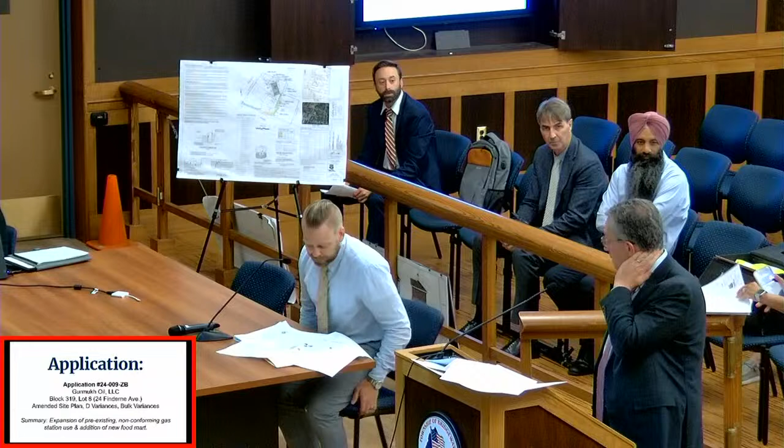What this depicts here, marked as A1 and identified by title block, is the Swept Path Exhibit dated May 6th, 2025. What we show here is an SUV parked at both fueling positions closest to the parking stalls, as well as cars accessing both the handicap stall and the stall next to it, which are nearest to those fueling positions. What we can see is the ability to back up at that 90 degree angle and avoid the vehicles that are fueling.

That exhibit depicts the fact that there will be no safety or circulation concerns with regard to the movement of vehicles such as an SUV around the site. Certainly there's space to maneuver, so the site remains safe and efficient for maneuverability. Correct. Thank you.

There was also a question Mr. Vandervalk asked regarding a drainage pipe at the property. The original site plan showed that the roof leaders from the canopy, as well as the roof leaders from the building, which currently doesn't exist, would be tied into the catch basin on the side street located to the south, that's 3rd Street. I have confirmed that pipe was installed, so when the new building is constructed, we would tie in those roof leaders into that existing pipe.

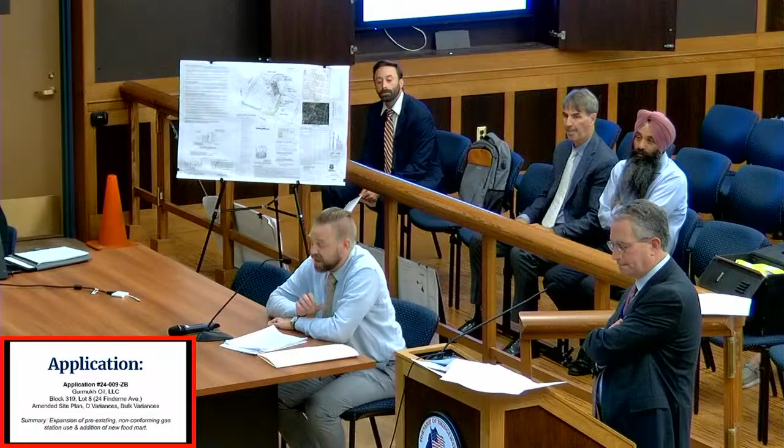There was also a question about whether it was trip generation or just circulation generated from this project. We did take a look at the trip generation based on the trip generation manual from the ITE, Institute of Transportation Engineers. If we were to use the land use category of convenience store and gas station, that category actually only bases trip generation on the number of fueling positions, so we would actually see no change in trip generation.

Seeing as that doesn't change anything, we've considered it as a standalone convenience store for purposes of determining how many additional trips we would see. The result was that during the morning peak hour, we would see 4 additional vehicles to the site, and in the evening peak hour, 3 additional. So in the morning, an additional car about every 15 minutes, and in the evening, an additional car about every 20 minutes.

And that's just based on a scenario where the only use on the site is a convenience store, correct? So if, in fact, as will be testified to, most of the patrons to the convenience store or mini mart are there primarily to fuel, that number is expected to actually decrease, correct? Yeah, correct.

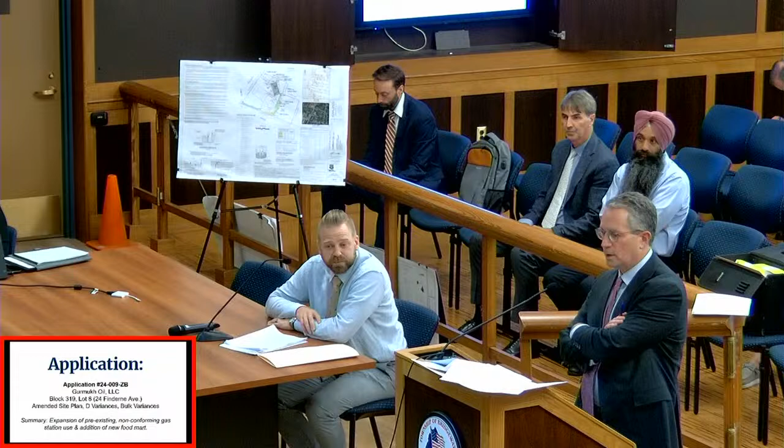As mentioned, when we considered both convenience and gas station, there was no change. So this was a conservative assumption to see that slight change. I believe that concludes the questioning of Mr. Vandervalk in terms of additional information that the board asked that we provide.

Board questions. I have a question. You provided this turning analysis to show you can back out a car here. Now the spot near the convenience store, that's an ADA, a van accessible ADA spot, correct? That's correct. So the vehicle that you use is an SUV. Is the van... have a larger turning radius than the SUV that you use to prove that the size of this parking area is acceptable? I wouldn't anticipate, so no.

So the van would have the same turning radius as an SUV. It would be comparable. Would that in any way, with what you're showing here with 2 cars at the pumps and 2 cars in the parking stall, would that in any way cause an issue for a van backing out? No.

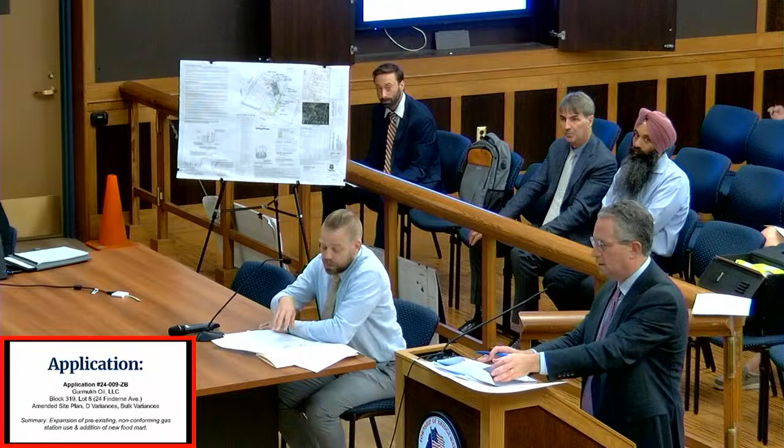Okay, thank you. I had a question. You marked on the east side, I guess that's the northeast side, as brush. When I was at the property, there are 2 mature trees there. I think they provide a substantial vegetative buffer. You're not planning to chop them down, right? Definitely not, everything's going to stay. The trees, for purposes of this exhibit, were removed from the survey. If you look at the original site plan file, they should be on there. I just wanted to make sure, because you have it marked brush, and brush tends to get cut down. I want to make sure the mature trees are not going to get touched in any way, shape, or form, because they provide a buffer to both neighbors on both sides. Absolutely. All right, thank you.

Other board questions? Members of the public, questions on engineering? All right, seeing none. Thank you, Mr. Chairman. At this time we'll call Ben Heller, our landscape architect, please.

Would you raise your right hand, please? Do you solemnly swear that the testimony you will give to this board will be the truth, the whole truth, and nothing but the truth, so help you God? And your full name for the record, please? Ben Heller. Would you spell your last name, please? H-E-L-L-E-R. Thank you, Mr. Heller.

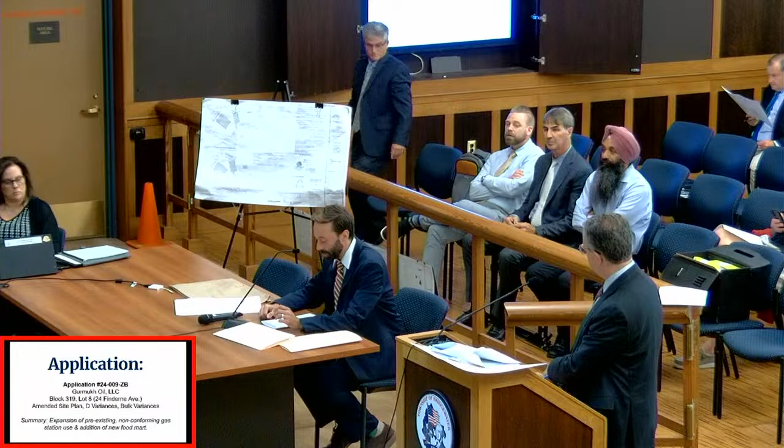Mr. Heller, can you please provide the board with your occupation, affiliation, areas of expertise, and license and experience in the field of landscape architecture? I am a licensed landscape architect in the state of New Jersey, New York, and Connecticut. I am a 2010 graduate of Rutgers University. I've been practicing landscape architecture since graduation. I've testified before various planning boards and zoning boards across the state, Washington Township, Closter, Summit, Frankford, Tenafly, Mendham. I'm the previous chairman of the planning board in West Orange as well. And your license in New Jersey is current and in good standing? It is, yes. All right, we accept you as an expert. Thank you.

Mr. Heller, you're familiar with the application, the property, and the surrounding neighborhood? I am. And you prepared a landscape plan in conjunction with this application? I did. Okay, I guess we're going to mark that as A2. Thank you.

So again, for the record, Mr. Heller, can you just identify what A2 is, please? A2 consists of the landscape plan which was previously approved by the board, and the proposed landscape plan for today. So if you would just go over, because there were some concerns raised appropriately by the board at the last hearing about some underbrush landscaping that may appear to be dying, and what we're going to be doing to address that.

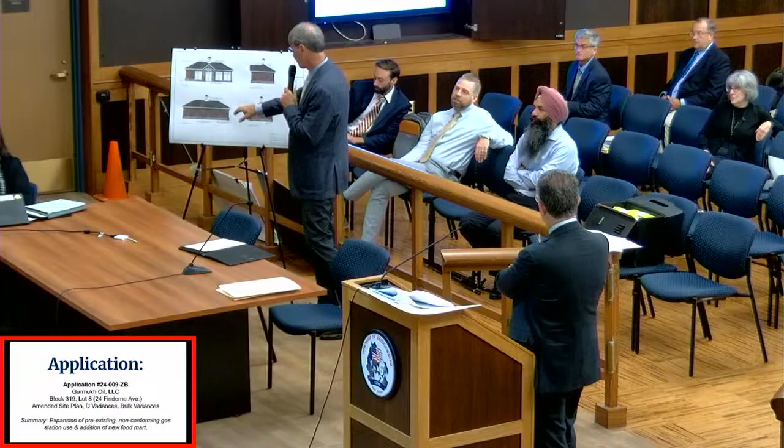So what we have here on the top left is the front elevation. This faces the canopy, with the main entrance door. We've added a stone veneer to the lower section, and to emphasize the front door, a treatment around that door with stone veneer. The stone veneer carries around all 4 sides of the building, so not to dismiss the sides or the rear, we have that stone band that comes up about 2.5 feet and extends around the 4 sides. The siding material being proposed is fiber cement.

It's a HardiePlank, which most people know it by. It's a quality product we use very often. It would be vertical siding in a traditional nature, board and batten type siding. Our office is in Chester, and a lot of what we do is historic architecture. I think it's a look that's very timeless and appropriate for this location.

The roofing material we're proposing is a standing seam metal, again to try to be consistent with the overall architectural features and style of the building, and we think it complements nicely. The height of the building proposed is similar or identical to the prior approval - 19 foot, 11 inches to the highest point from average grade, from finished floor. The only addition to that height is the center cupola we've proposed, just to create a little drama and balance to what's now a fairly symmetric building.

Sheet number 2 of our set, again unchanged and unrevised, so this is exactly what you guys have gotten to see. Represents the floor plan that's proposed. And again, you can see it's a fairly simple building, 25 feet front to back by 50 feet in width. Same essential envelope as the prior building, but the prior building just had that cutout on one side that we've infilled here.

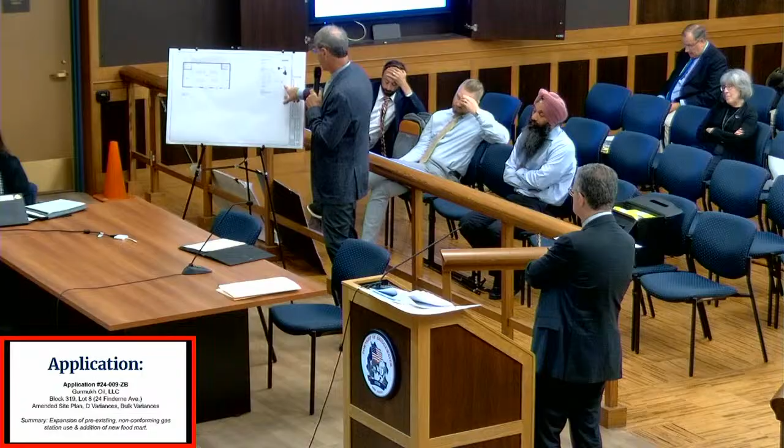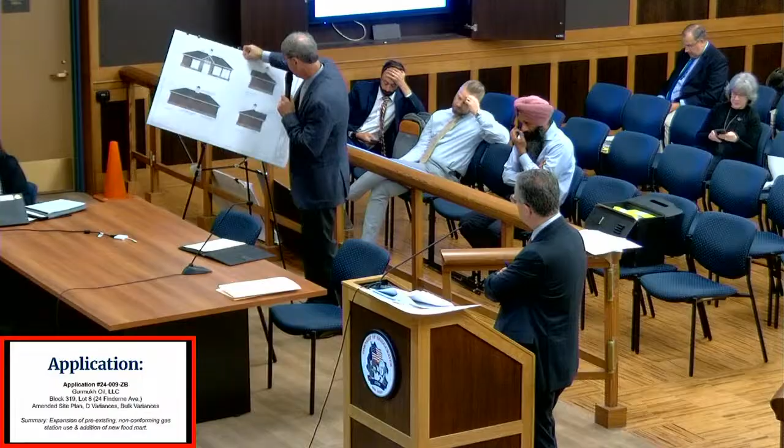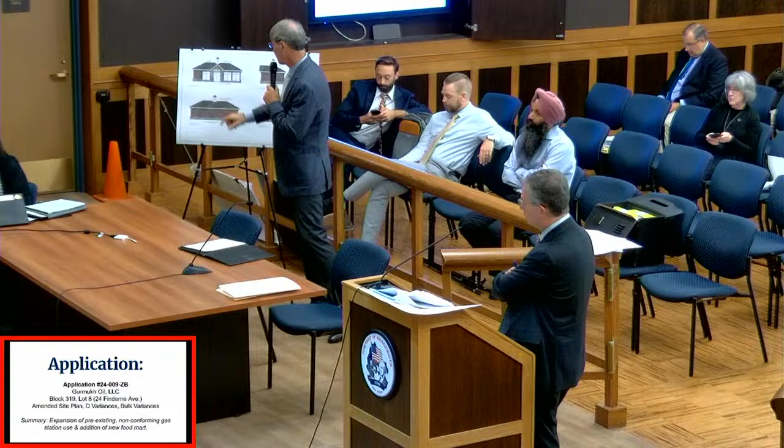And lastly, on this design, we've got the sign light detail, which is just the gooseneck light we'd be installing over the front building-mounted sign above the door. That would be located in this location in the gable. We are proposing one sign that indicates the name of the market as Pleasant Market. The sign dimension is 2.5 feet in height and 6 feet in width, roughly the width of the front entrance doors. So essentially that is what we're proposing.

And you believe, based on your experience in architecture and familiarity with the area, that the proposed design is appropriate and would blend in well with the neighborhood? I do feel it's appropriate. I did notice that the prior approval had a building that was primarily masonry with cement plaster, stucco on the back and sides. I don't find that to be particularly consistent with the neighborhood. So our goal here was to try to create something that was, I think, a little more compatible, and I think we've done that.

Okay, I have nothing further from Mr. Byrne. Questions? Are there any other structures planned, like an enclosure for garbage, or if propane is sold there, would that be enclosed as well? To my knowledge, there's no other structures proposed, none that we were involved with designing, so I would think not. I mean, the canopy exists today, and I don't think there's any proposed changes to that.

I'm sorry, so the garbage is going to be just a dumpster? I would defer that question to our site engineer. There is a masonry enclosure that exists today, Vandervalk is just going to clarify. They do need to repair and replace the doors on it, but that was constructed as part of the last approval.

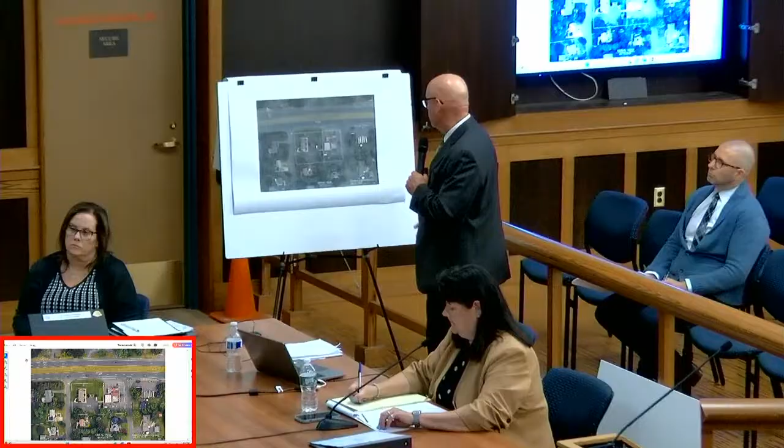Identify it first. I will be discussing the site plans which were submitted, consisting of 8 sheets dated last revised April 3rd, 2025. I also have a few exhibits. Do you need the site plan set marked? We don't have exhibits to mark yet for what you're about to talk about, right? Why don't we mark that A1, and then you can identify what that is for the record, and put today's date on it as well.

This is a Google map aerial photo dated 2025. It indicates the existing properties surrounding U.S. Highway Route 202 and the surrounding streets. I'll describe what this exhibit consists of.

Two properties: block 163.02, lot 17, known as 705 U.S. Highway 202, is developed with an existing two-story, approximately 3,675 square foot Cafe Amelia restaurant. Block 163.02, lot 9, known as 49 Charlotte Drive, is developed as an existing one-story, approximately 1,418 square foot church, which is to be removed.

Lot 17 is approximately 0.352 acres, and lot 9 is approximately 0.543 acres, both combined totaling 0.895 acres. The property has 3 frontages, one on US Highway 202, and the other two on Charlotte Drive West and Charlotte Drive East. The property is located in the R20 zone, and the surrounding uses include residential and commercial uses.

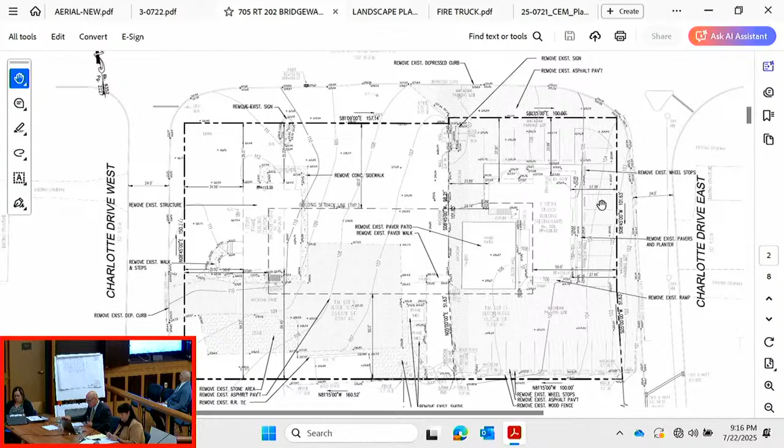There is a variance required for the expansion, and what I will do is switch to the site plan at this point. Is that part of the site plan set? Yes, it is. This is sheet 3. Sheet 3, okay.

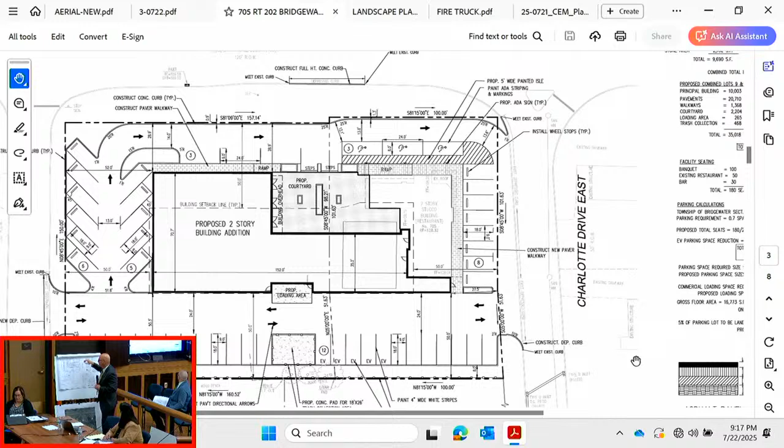Along Charlotte Drive East, there is an extension of the existing restaurant, approximately 10 feet in width, and that would also extend the front yard variance requirement for this application, just for that 10-foot location.

Existing days and hours of operation: Monday through Friday for the restaurant is noon to 10 p.m., Saturday is 3:30 to 11 p.m., and Sunday is 3:30 to 9 p.m.

Could you repeat those times again? These are the current hours of operation: Monday through Friday, noon to 10 p.m.; Saturday, 3:30 p.m. to 11 p.m.; Sunday, 3:30 p.m. to 9 p.m. And the current peak hours are Monday through Saturday, 6 p.m. to 9 p.m.

The applicant is proposing days and hours of operation for the restaurant and banquet hall: Monday through Saturday, noon to 11 p.m., and Sunday, noon to 10 p.m. The rooftop bar days and hours is Monday through Wednesday, noon to 11 p.m., Thursday through Saturday, noon to 12 a.m., and Sunday, noon to 10 p.m.

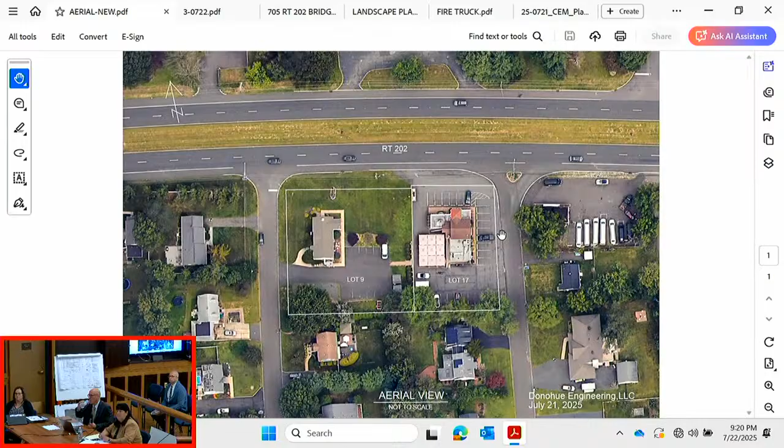So who approved it? They must have been in front of a land use board at some point. They must have. So can you show us that, please? Not right now, I can't, but we'll do an open request with your records. You would be the keepers of the records, so we'll see if you guys have the original resolutions. And you haven't done that yet? We may have done an open request, but I don't have it with me now. I don't bring the entire file with me.

Dog ate your homework? No, I don't bring old resolutions with me normally to a board hearing. So how did you get to 94.68%? That's the way it is. I can't give you the past history. I wasn't here 26 years ago, but we'll find the answer out for you.

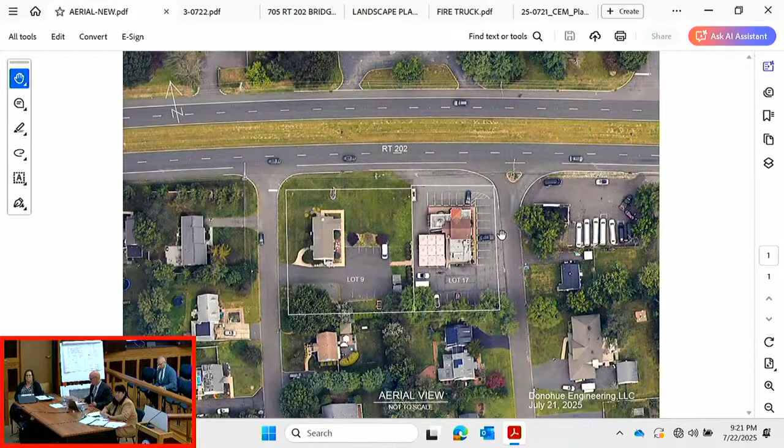You would probably know better than I. You guys sit on the board and... I haven't been a board member for 26 years. So in the last 26 years, this board certainly has not granted a pretty wild impervious coverage ratio like that. Okay, but it's been there, and that's just a fact that we're presenting. That's an existing site condition.

So it's your answer that you don't have an answer, how you got to 94? I don't have an answer what happened 26 years ago, no. Yeah, but it's a fair question. It's a very combative answer because, I mean, the theme tonight, and you sat in the audience, was about being good neighbors. And we're trying to figure out a way to be good neighbors. And to be combative certainly is not a good way to be with the zoning board.

So I feel like you're actually the one being combative. I'm just answering the question as best I can. But you don't have an answer. No, but I said I would get you one. So I think that's a fair response.

To find the history and know where we're at, to make a judgment on a piece of property, you have to have all the relevant facts. And to come in here and not have a history on the property is pretty incredible. And then you tell me I don't know where the dumpster is, and your own exhibit showed exactly where the dumpster was that I showed tonight, because you don't have a dumpster on the exhibit on the TV right there on lot 17, but you do have two dumpsters that I saw tonight overflowing on Lot 9.

So, yes, I'm quite combative because you're not answering in an honest manner, in my opinion. I take offense to that. I've answered your questions, please take all the offense you want. Yeah, but I will. This board is entitled - I don't know why you're being so combative.

We're trying to present that this board is entitled to a history on the property. Right, and you are the keepers of the history, so. I'm not the keeper of the history. I'll answer for you the next time we're here. I'll give you the complete history lesson.

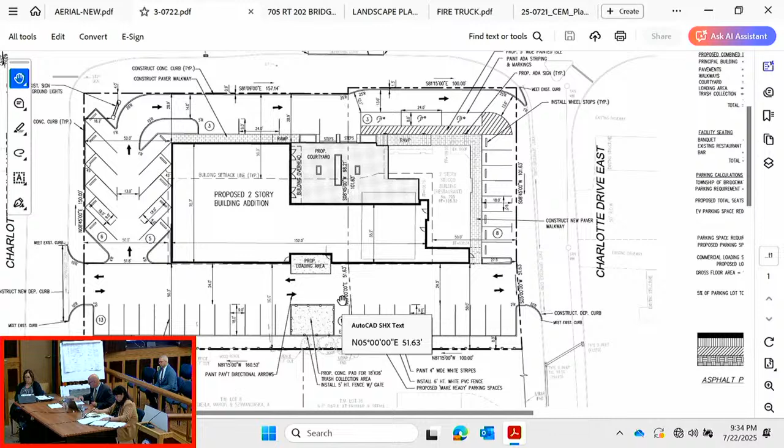Snow removal for the property will be handled by a private hauler, a private company. Snow that's more than 3 inches will be plowed, shoveled, and salted, and there will be no stockpiling of snow on the facility.

There is an existing sign along the frontage where the cafe is. That sign will be relocated, and this is an exhibit which I will mark. Should be A2. And just put today's date on that as well, and then describe what A2 is for the record, please.

This is a revised site plan which indicates the relocation of the existing sign to the northwest corner landscaped area. It indicates that on this site plan with a US Highway 202 and a 16.2 setback to Charlotte Drive West.

There is a requirement for the setback to be 20 feet from the highway, so a design waiver is required for that. I'm sorry, 20 feet, and what are you proposing? 4. 4? 4. What's the existing setback? The existing setback is 6.

For the sign area of the existing sign, the requirement is 5% of the maximum building facade, front building facade. The building facade is approximately 3,464 square feet, which equates to 173 square feet for maximum sign area. The existing sign is 4 feet by 7.5 feet in size, so that's 30 square feet. So the existing sign complies with the new building facade.

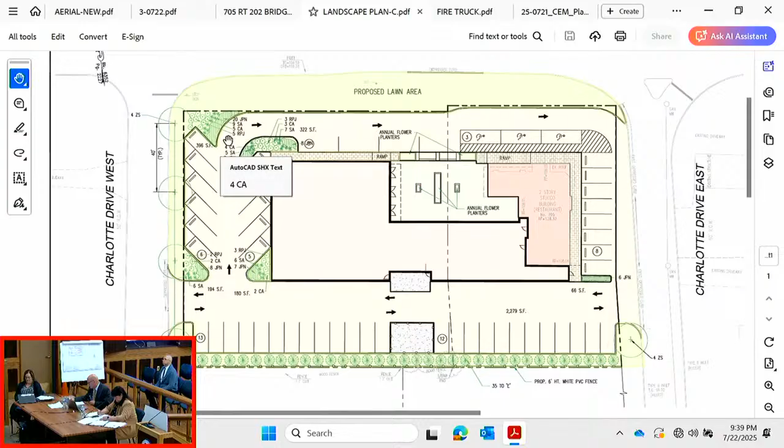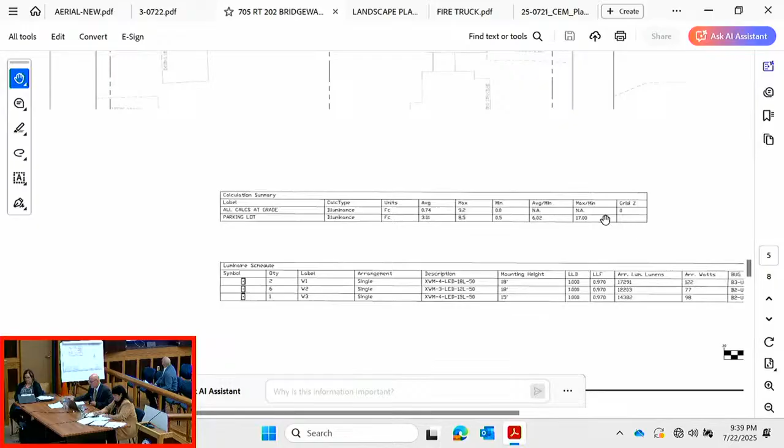Next I will switch to the lighting plan. Lighting plan is sheet number 5 of 8.

The applicant is proposing 9 LED lights attached to the building walls, ranging 15 to 18 feet in height. The wall-mounted fixtures will point the lighting directly to the pavement below, and as indicated on the analysis, the lighting plan conforms with the ordinance requirements.

The lights will be turned off at the close of business with the exception of security lighting on site, which will also be set by timer. The lighting design indicates a 0-foot candle along the rear property line where the arborvitae trees and the 6-foot high PVC fence will be attached and installed.

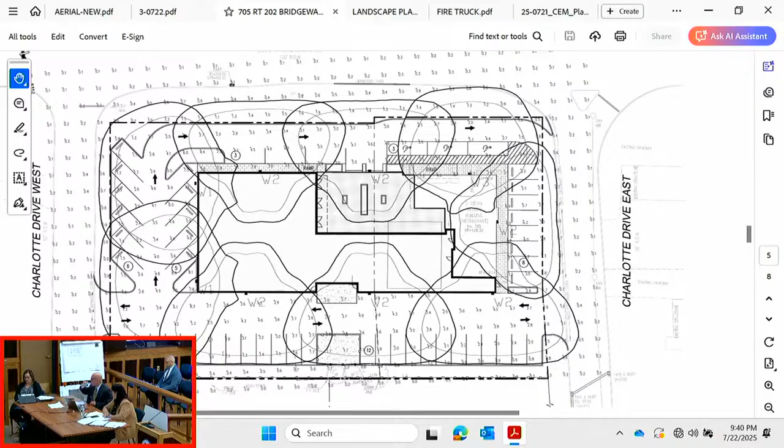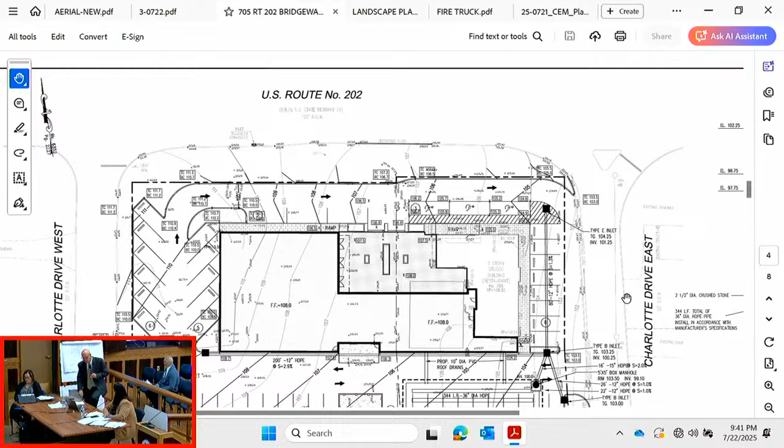Next I will talk about the grading and drainage plan which is proposed. What sheet are we looking at now? This is sheet 4 of 8.

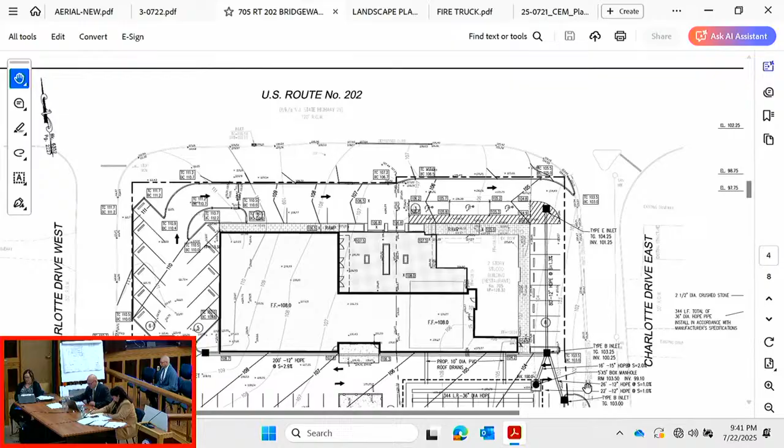Currently, both lots 9 and 17 slope in a west to east direction, so from Charlotte Drive West to Charlotte Drive East, all current roof runoff, pavement areas, and lawn areas sheet flow to Charlotte Drive East, then discharge into an existing street drainage system.

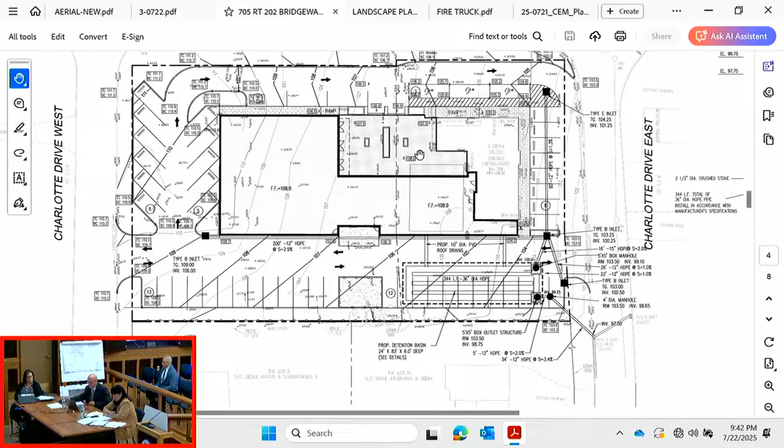There's no on-site storm drainage structures on both properties at this point in Charlotte Drive East. The applicant is proposing to install a new stormwater collection drainage system on site, which will collect runoff from the pavement areas into a new drainage system and then into an underground detention basin, which will collect water from the roof along with the pavement areas.

The detention basin is sized to reduce the pre-development 2, 10, and 100-year peak stormwater runoffs by 50, 75, and 80% respectively, which complies with the requirements. The detention basin will discharge through an outlet structure and be connected to the existing drainage system in Charlotte Drive East.

The applicant at this point is not proposing any new water or sanitary sewer service. The existing services are adequate for the new use. An additional power supply will probably be required, and that'll be worked out with the utility company. The existing sprinkler system in the restaurant may be expanded to the new addition.

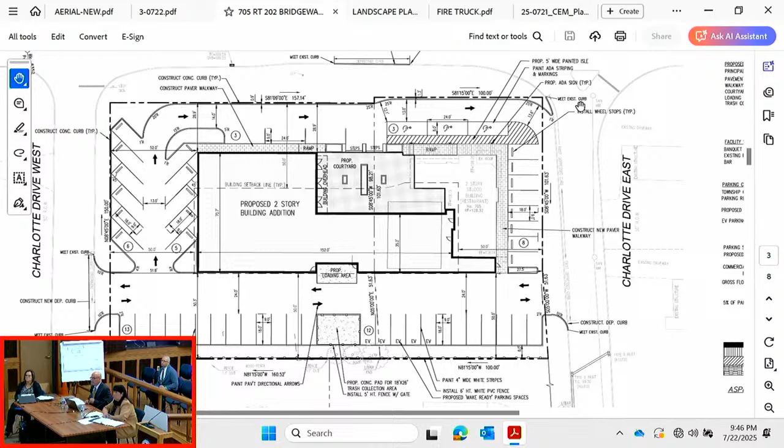So the applicant would be proposing the 24-foot wide aisleway to the rear of the building to satisfy the requirements of the fire marshal. Okay, but he asked for it around the building, right? They asked for it around the building, yes, but this is what we're providing.

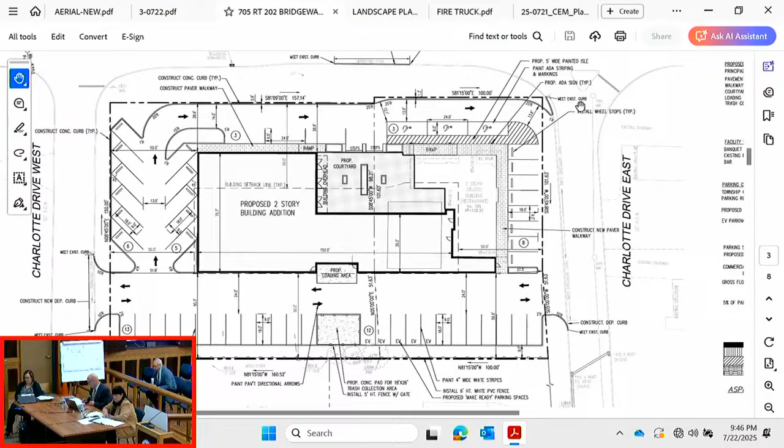And we'll just have discussions with the fire marshal about that. They're also asking for a fire hydrant to be installed along Route 202 near Charlotte Drive West, which the applicant will comply with, and have a fire department connection within 50 feet of the fire hydrant on the building. The applicant will comply with that. And if there's any other requirements that the fire marshal would have, we would have those discussions with him.

Are you going to do that before the next meeting? It has to be done for the next meeting. I mean, this is, I can't even believe you're here.

The Somerset County Planning Board has reviewed the plans, and we received a letter dated June 5th, 2025, where the Planning Board does not have any comments and approves the project.

The Bridgewater Township Police Department traffic unit had no comments or objections to the proposed site plan. That was via an email dated 5/28/2025.

There's a comment from the tax assessor where the two lots will be consolidated by deed within 60 days of the approval of the project. That will be done.

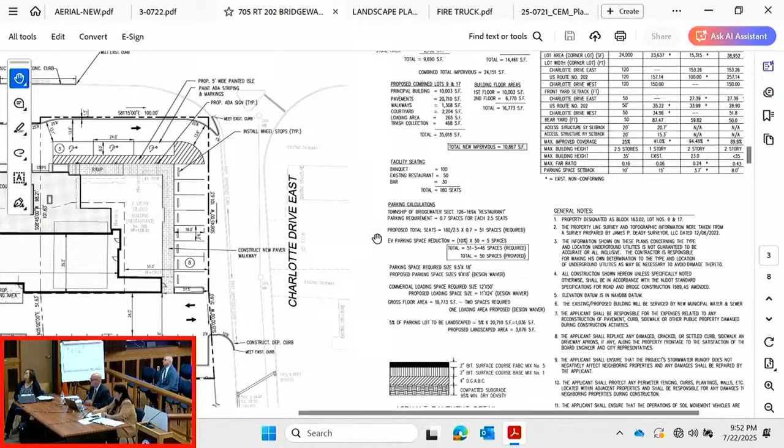And where would there be overflow parking? Because I understand it complies with the zoning, but this is an R20 zone. I don't really know many people that commute to work as a group, maybe very few. Understanding this is an area with many corporations, where would the overflow parking go?

I'm not sure if there would be overflow parking.

Project plans comply with the requirements of the zoning ordinance. You closed off the entrance at 202, so now you're forcing 100% of the traffic to use residential roads. In your professional opinion, do you think that is a good way to manage traffic? It's just entering and exiting onto the area that's currently used by both the restaurant and the church.

And how is it beneficial to close the entrance currently on 202? Because it does not direct traffic coming directly off of Route 202 into the site. It provides a means to direct traffic onto Charlotte Drive East and then into the rear access aisleway.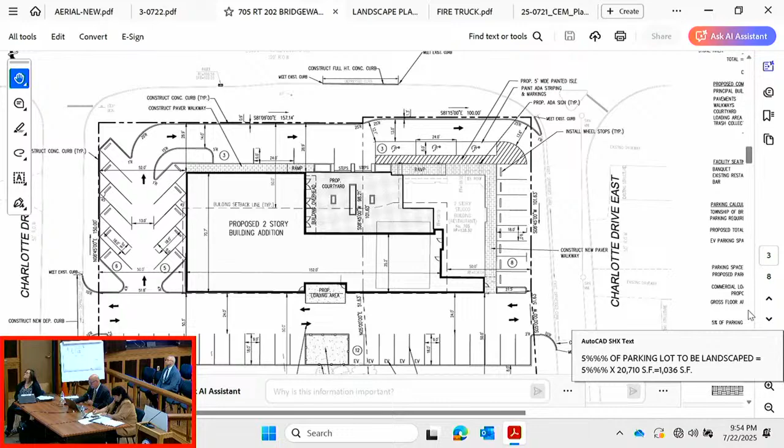Okay, my last question on the detention basin. Are there any requirements from offset distance from property lines to detention basins? Not that I'm aware of. And currently, how far is it from the property line? To the rear, it appears to be - I'll take a measurement.

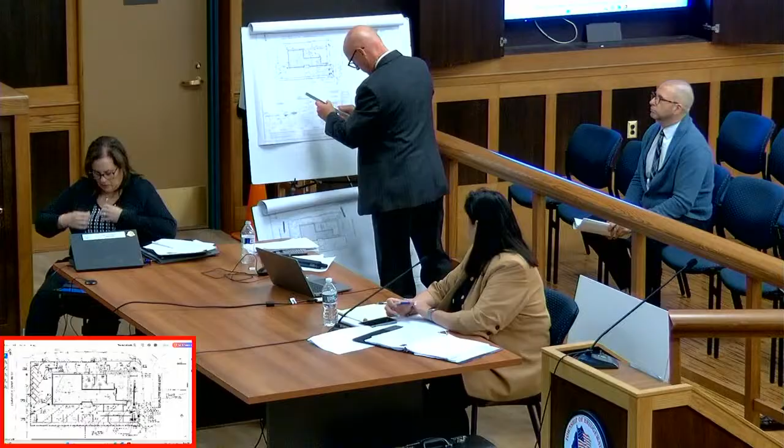It's approximately 10 feet to the rear property line and 15 feet to the right-of-way over at Charlotte Drive East. Actually, I had one more question, sorry. On the rooftop bar, you mentioned there's 30 seats. What's the occupancy load for these bars? Is everyone assumed to be seated? That would be a better question for the architect. Will do, thank you.

Any other board questions, board professionals? Thank you, Mr. Chairman. As far as the parking calculation, did you derive those numbers yourself, or were they given to you from the architect about the number of seats? That was by the architect.

I had raised in my review memo that a count of the seats from the architectural plans does not comport with the 180. The catering part alone, just so the board knows, doesn't show 100 seats, it shows 104. So it's only 4 seats, but that compounds with the other areas.

Do you know if the courtyard areas were included in the seating calculation? No, I don't believe so, because that's not included as a specific area. It's more of an area that if anyone was in the restaurant or in the bar, they would go there temporarily, or when they entered the facility, they would meet people in that courtyard area.